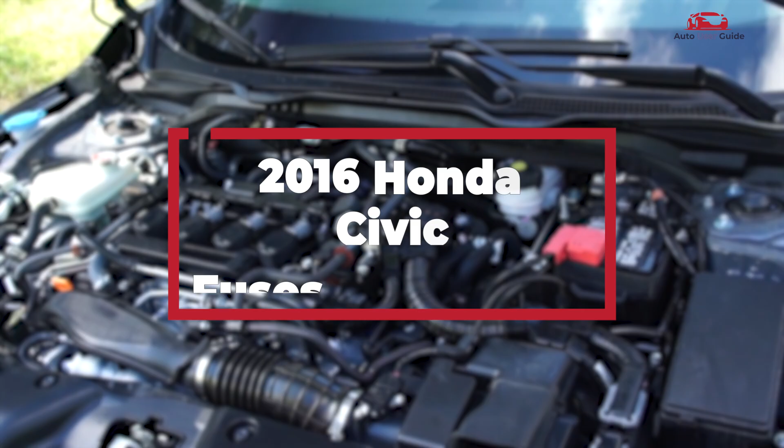Where is the fuse box located in your 2016 Honda Civic, and what do the fuses control? In this guide, we'll explore the fuse box diagram and location to help you troubleshoot electrical issues and maintain your vehicle's essential functions.

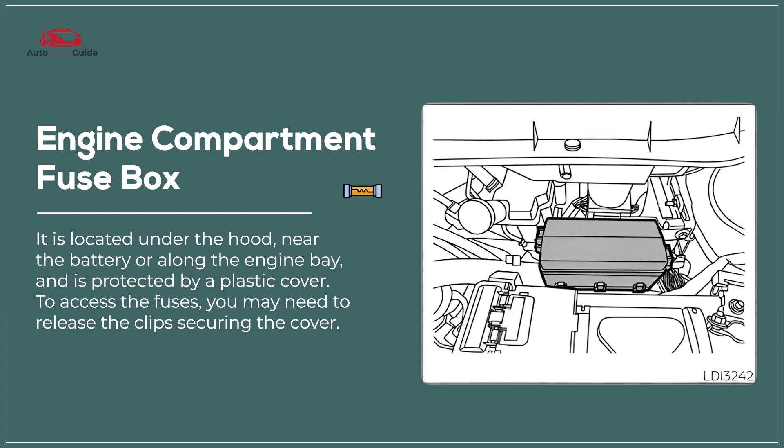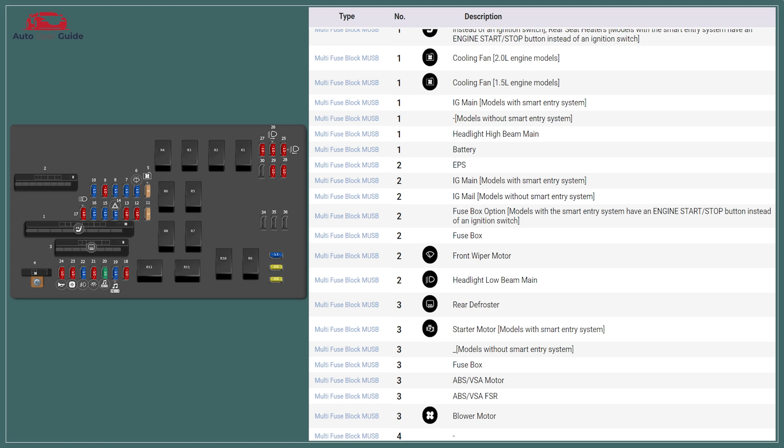Engine compartment fuse box. The engine compartment fuse box houses essential fuses and relays that protect electrical components like the engine control unit, cooling fans, and fuel system. It is typically located near the battery for easy access and maintenance.

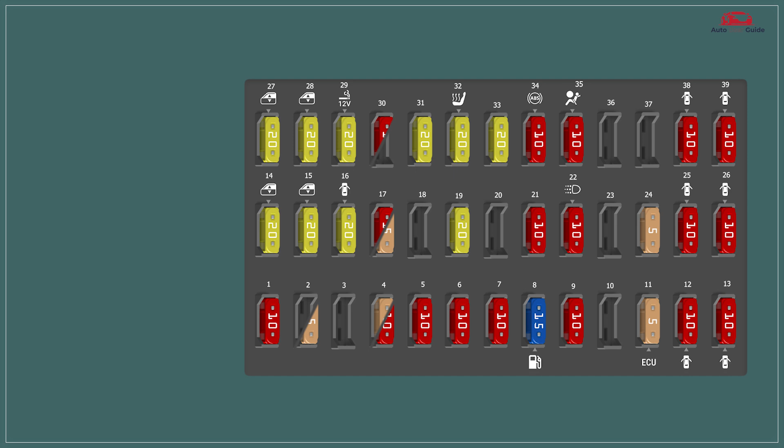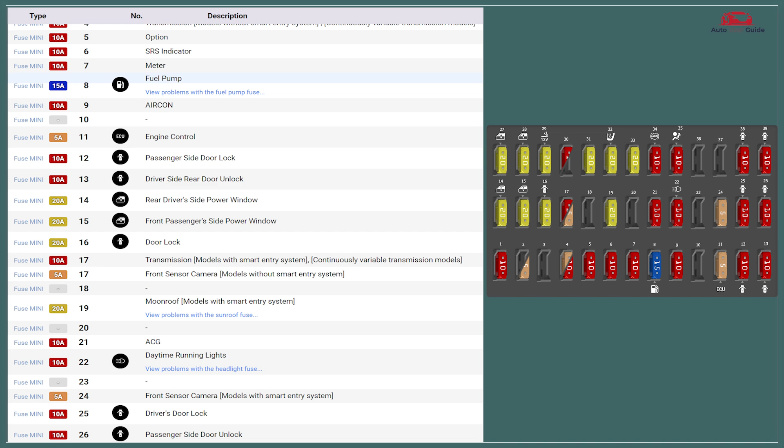Passenger compartment fuse box. The passenger compartment fuse box protects various electrical circuits inside the vehicle, such as interior lighting, infotainment, and power windows. It is usually located under the dashboard or behind a panel near the driver's side. Each fuse is labeled with its amperage rating, ensuring proper circuit protection and easy troubleshooting.

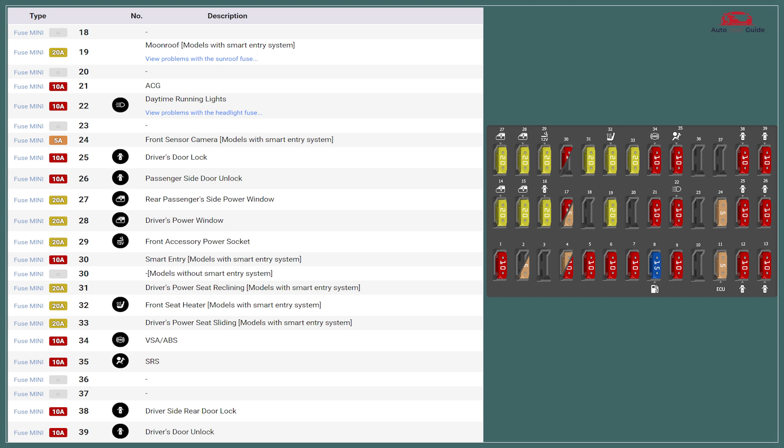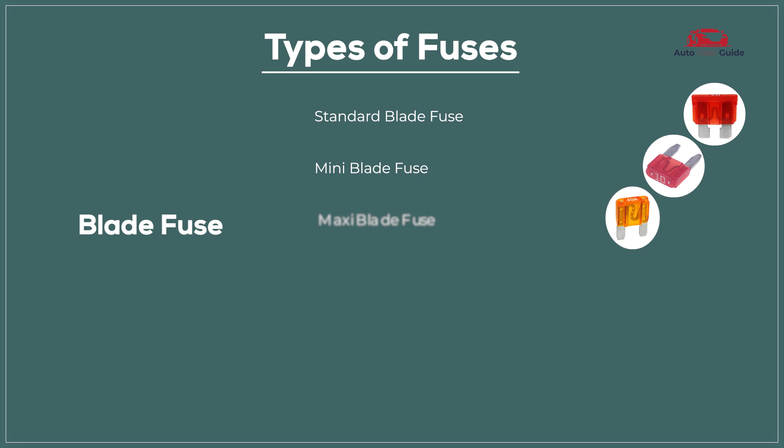Types of fuses: blade fuse, standard blade fuse, mini blade fuse, maxi blade fuse, micro 2 fuse, micro 3 fuse, J-case fuse, glass tube fuse, AGC fuse, SFE fuse, ceramic fuse, Bosch fuse, DIN fuse, PAL fuse, low-profile PAL fuse, standard PAL fuse, link fuse, mega fuse, high amperage link fuse.

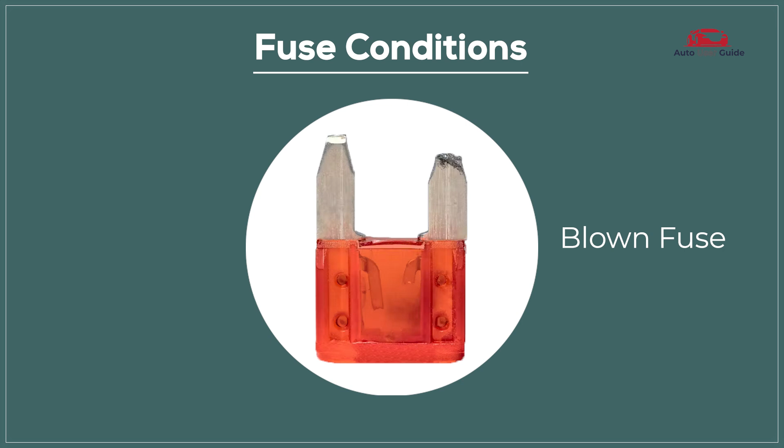Fuse conditions: blown fuse. A blown fuse means it's no longer functioning and needs replacement, while a perfect fuse is in good working condition and performing as expected.

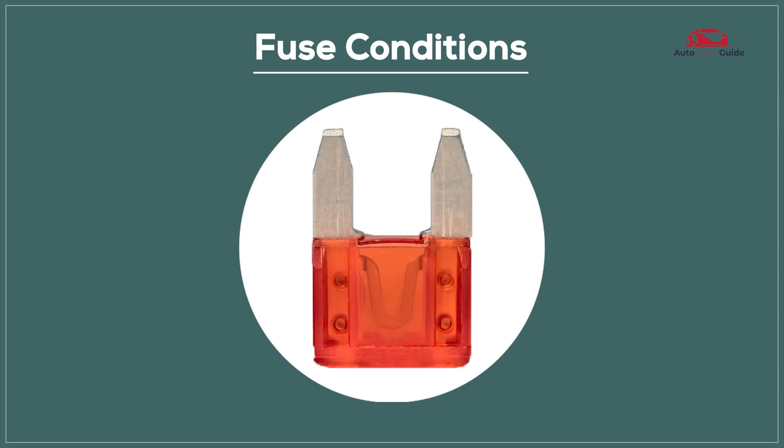How to change fuses: turn off the vehicle, locate the fuse box, identify the faulty fuse, remove the faulty fuse, inspect and obtain a replacement, install the new fuse, test the replacement.